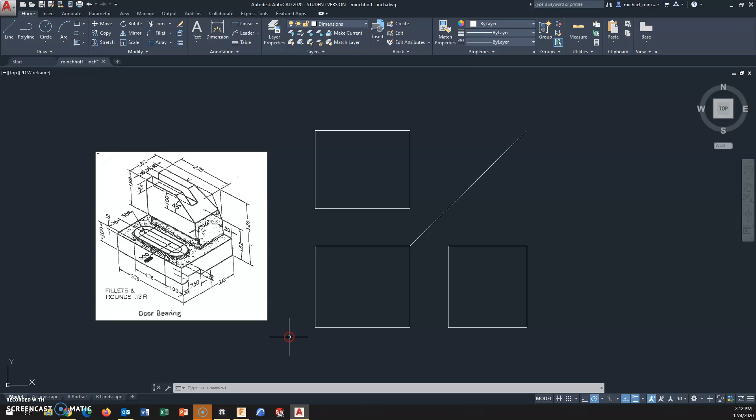Okay, the last drawing for this semester is the door bearing. We are back in our inch template, first of all.

Keep that in mind, the fact that we are in inches. We were using a 1.5 inch space in between the views, and we're going to stick with that. We're not going to change it now.

Typically the mistake is the height of this slot. The distance from the bottom to the top of the slot is 1 inch, which means this base material will be 1 minus 0.12. So this base material is only going to be 0.88 inches thick, because the 1 inch is to the top of this raised slot.

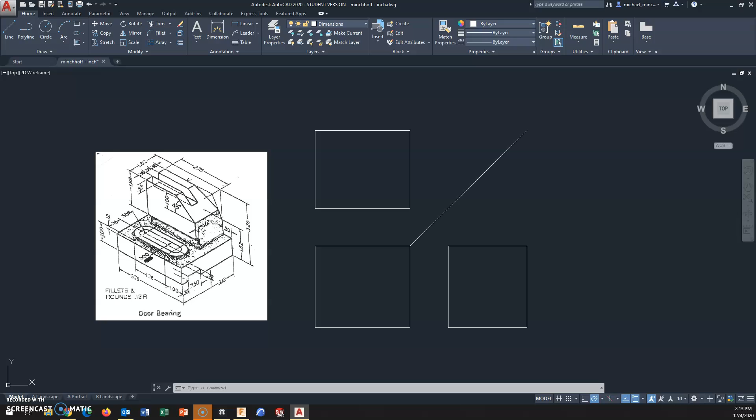I don't have that much else to say. We're just going to get right into it.

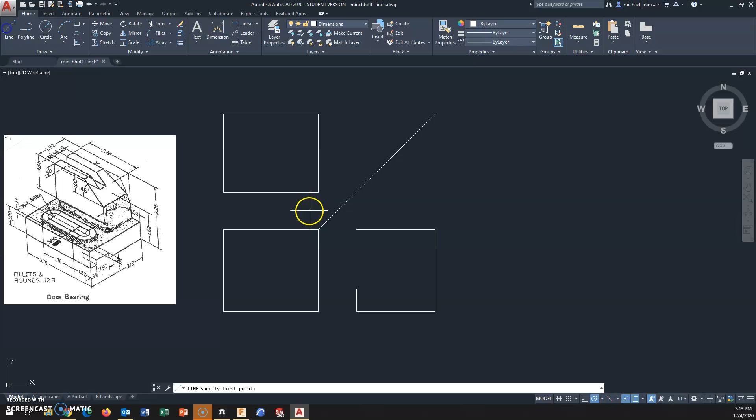And work right here off the right side for a good portion of this. 162 across the top.

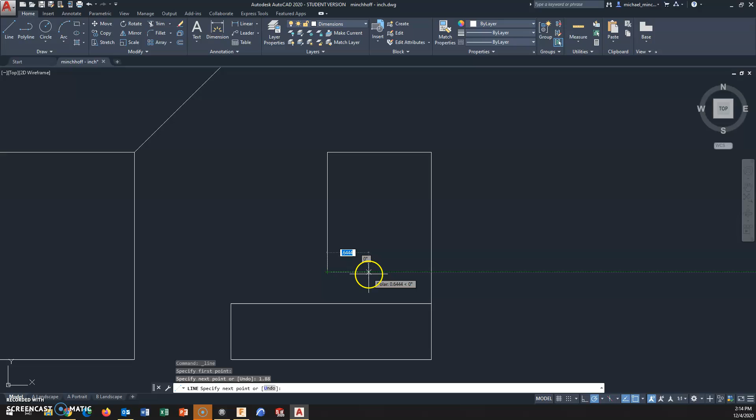And we'll start making some other features here. This drops straight down for a little bit. 188 comes in 0.12, makes this little undercut right here.

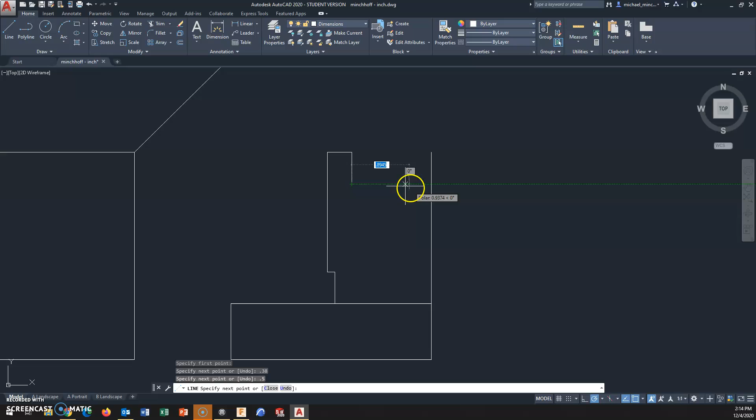From here, we're going to measure over, down, and back up to make that groove cut here in the top. So 0.38, 0.5 down, 0.38, 0.5 back up, and 0.38.

This comes down at an angle. We don't really know exactly where it meets at this point. We do know that this backside is 1.62 up from the bottom.

This will now allow us to create that angle on the backside. It's not an angle measurement, it is from point to point.

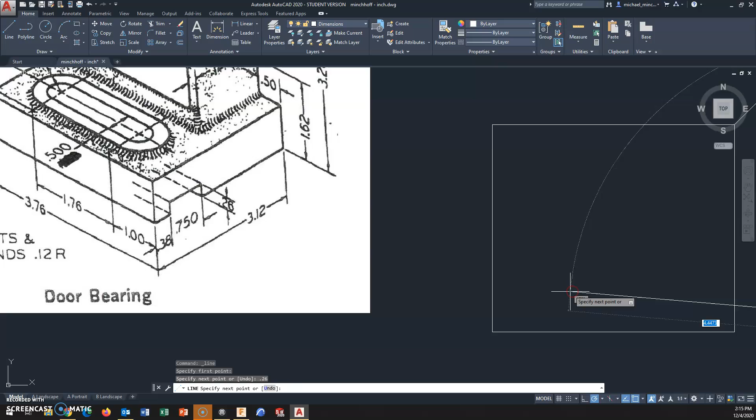We have a groove that goes through the bottom, and as we measure across, it is 0.38 over, 0.26 up, 0.75 or 0.76, 0.75, and back down and over.

We could come and construct a raised slot, but I wouldn't say we'd be guessing, but it necessarily doesn't line up with the center here. I would create that slot in another view prior to creating it.

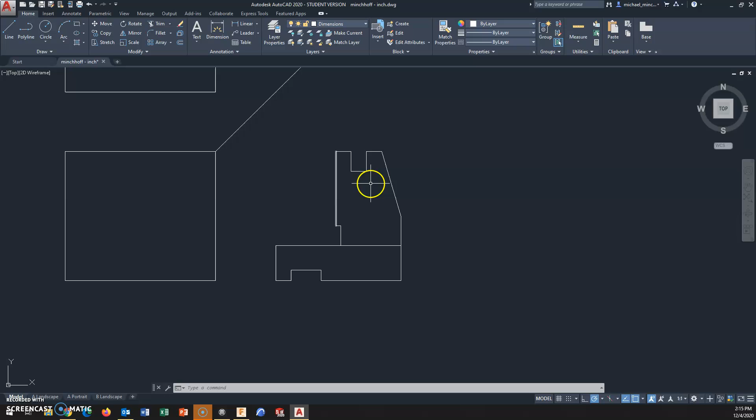There's also an edge that goes across here. The fact that it's a 45-degree angle, we could measure 1 inch down and do that, but I'd wait till you have something to project off of.

All right, object line, hidden line. Might as well change that now. Okay.

We measure in 1/2 inch on both sides. And these will drop straight down to the base.

This is due to the fact you can easily see this 1/2 inch on this side, but this overall length of this vertical section is 2.76. So 3.76 minus 2.76 minus 0.5 gives you a 1/2 inch left over on this side.

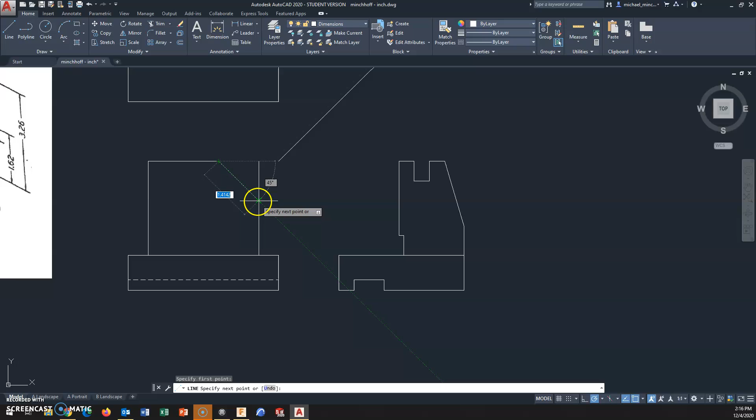We have a 45-degree angle at 1 inch. I have my 45-degree angle snap turned on. Project straight down.

The edge of that machined face comes right across. I have this back edge that will be a hidden line, and I have the groove that goes through that will be a hidden line. I'll run that all the way across.

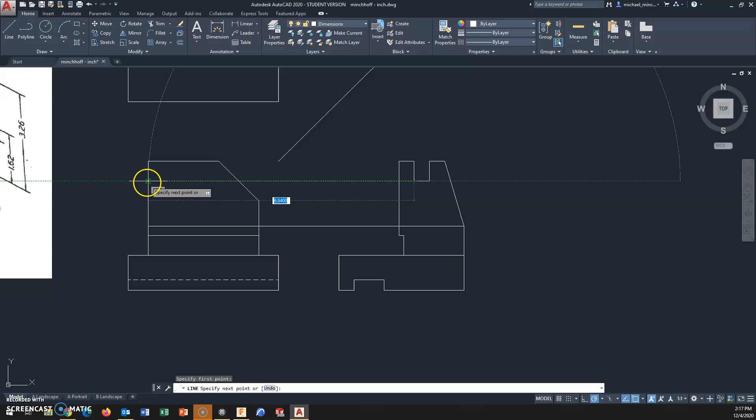It's close to the midpoint. Actually, it should be on the midpoint, but these two are going to be hidden.

Okay, so we've taken care of everything really but the slot in the front and the right side view. Projection to the top.

This is that groove, or sorry, this is the width here at the top. This is the 45-degree angle cut.

And now we're going to project from the right side. So as this comes up, over and across, take these off as we go.

This groove is going to continue across.

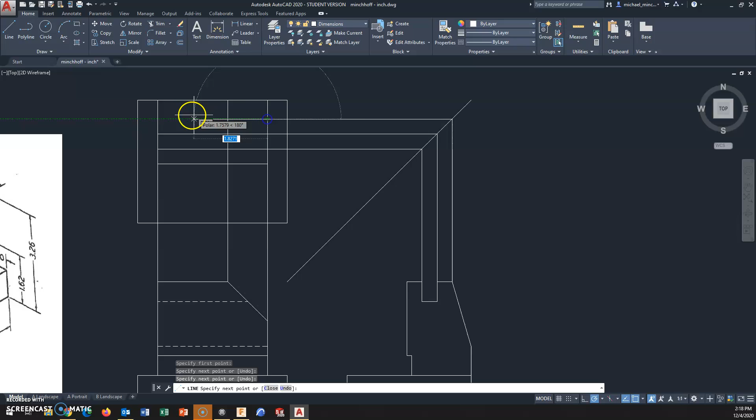Mirroring doesn't help here. It's not a symmetrical object, so there's no mirroring involved. And this is that back side, so this will come into play as we go to project this.

All right, so this groove that goes through the top, this edge is actually going to stop right here, so I'm going to trim that one off. This line won't exist because that's on that machined angled face in the back. So let's take some of these off. Oops, not the whole thing.

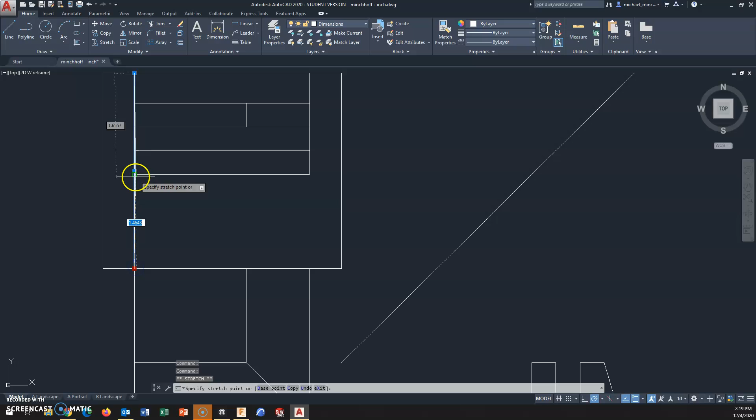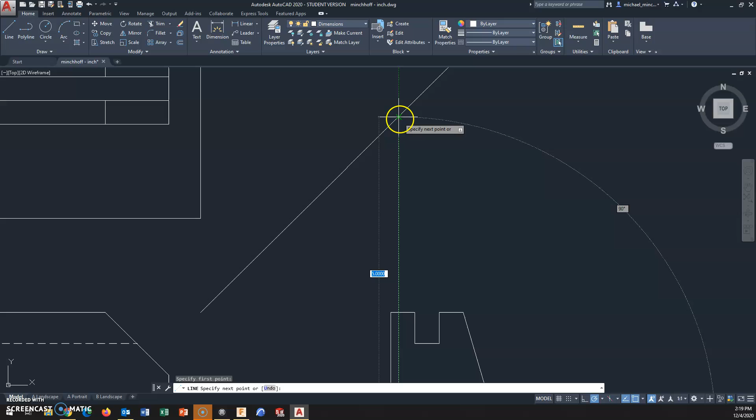Okay, there'll be a hidden... darn it, I just trimmed that off and then I deleted it. There will be a hidden line for that little undercut, and this is the hidden line.

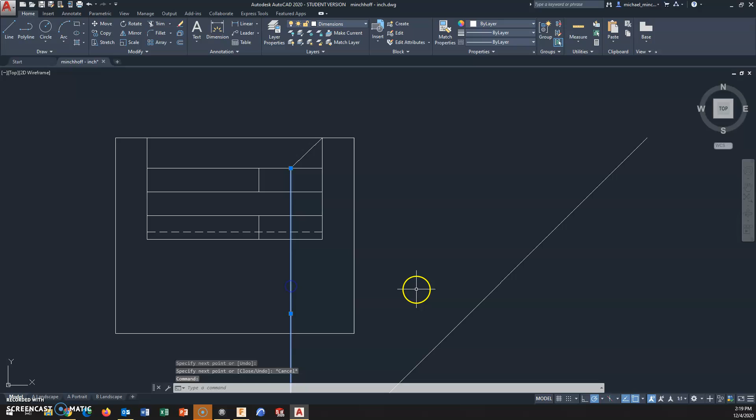Okay, this back machine face will fade at an angle, and that is directly from here where that takes place. So this surface actually flares out.

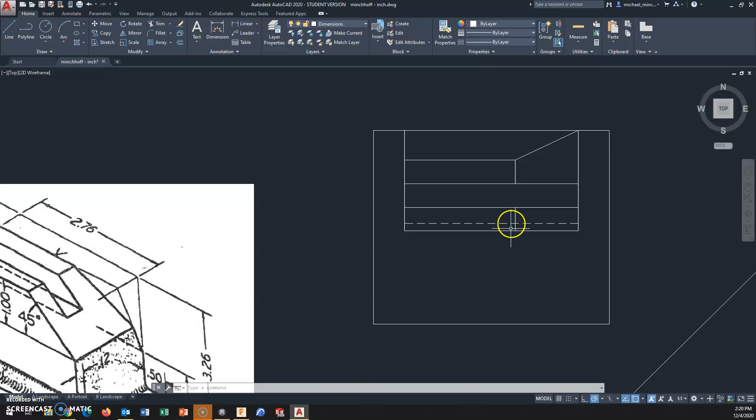That is, oops, sorry, wrong point. Forget that projection. This surface here, that flared out, that trapezoid, is actually this being cut at the angle. Okay, 45-degree angle projection here, said earlier.

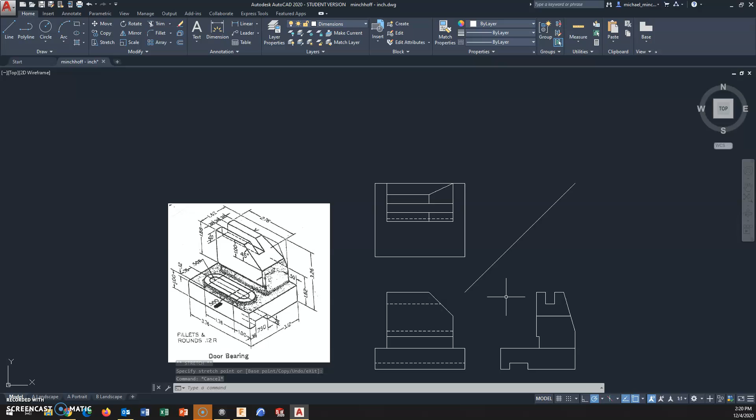And all I should have to do now is create the slot. No, this is the projection. I think I do these ahead of time, then forget stuff. These lines do not extend out past. This is where that groove starts and stops. So this surface in here is this surface right here.

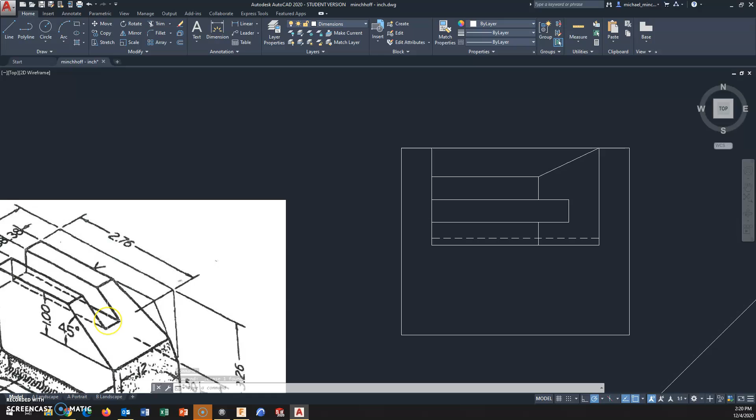Okay, to the slot. We know that this slot takes place 0.75 inches in, 1 inch over, and then the distance from center to center is 1.78. So I'm going to delete this now because I have marks for my slot that I need to create.

So this slot width is 0.5 for the inner slot. Then the outer slot is a radius of 0.5. I guess I should draw this in radius. Is a radius of 0.5, and a radius of 0.5. Tangent lines at the quadrant points, and we'll trim this out.

Quite a bit of trimming involved here. There's the outer. Here's the inner.

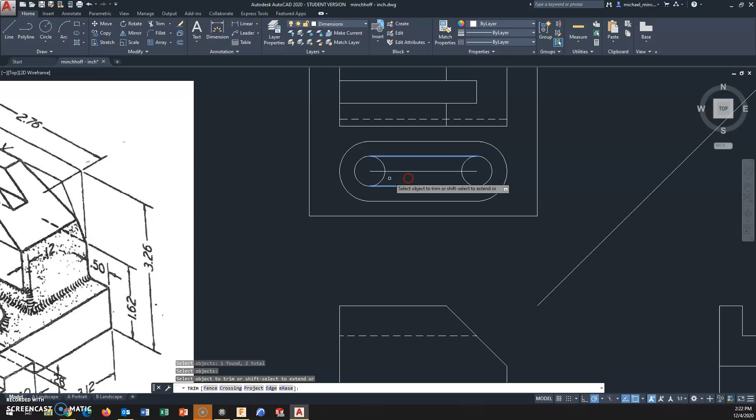Okay, so we need to project this all the way through as well. So it does line up here. So you only have to worry about taking a measurement vertically. This one's going to go all the way through.

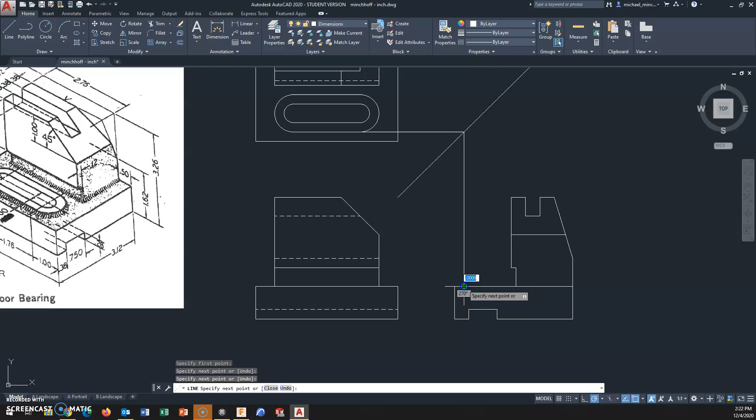I think I would create the raised slot, the fact that it's raised, in this view first. So this is 0.12.

All right, so 0.12, I'll have a line that goes across here. Actually, I know it's 1, and drop it straight down. Now this line can project here. All right, so this and this line up.

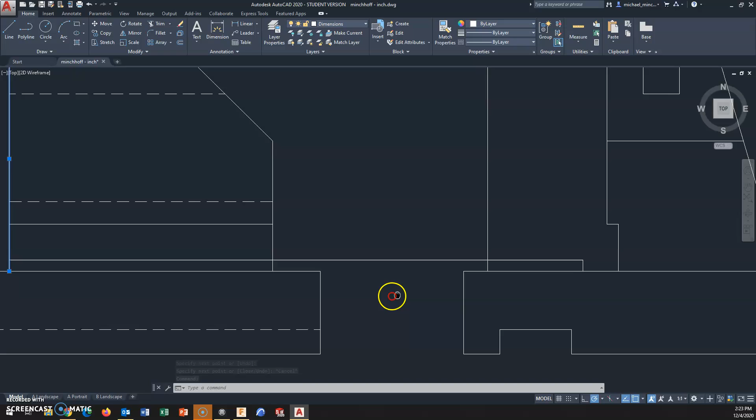Well, we'll put some fillets in here, but that's the starting point for that raised slot.

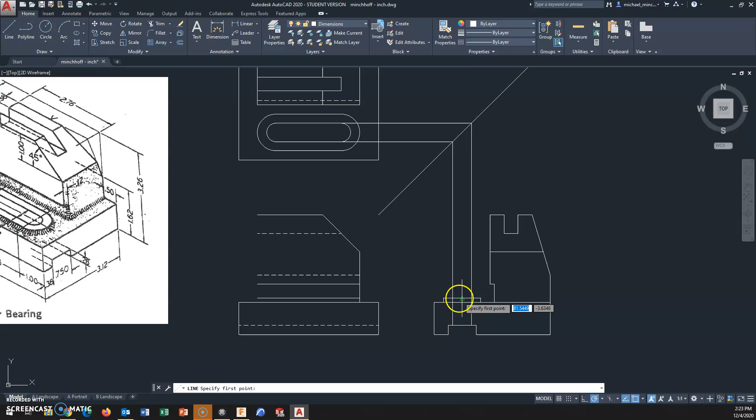So we do need to project the inner slot information, and this will go all the way through. These will become hidden lines, and I might as well project my center line. There we go. Okay.

That line's not straight. It is not straight, or it does not line up on the bottom. It is awful close. Oh, 0.125 extends up past the edge of the object, and that is a center line.

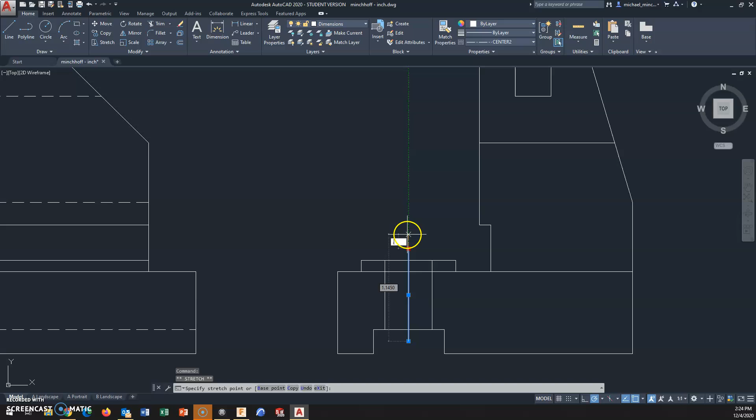A little more. Line type appears. These are hidden. Okay. Ooh. Lost it somehow.

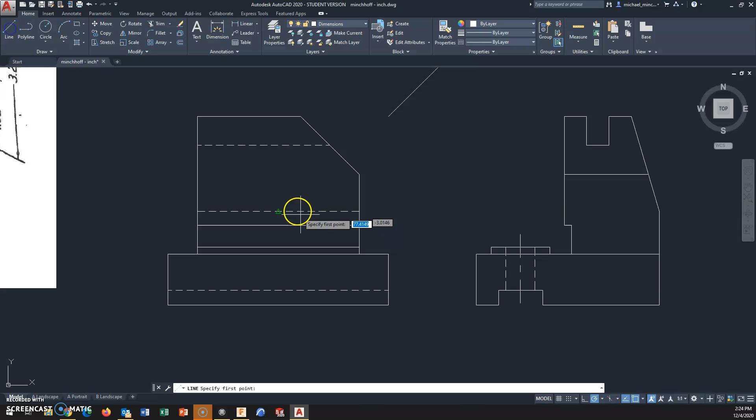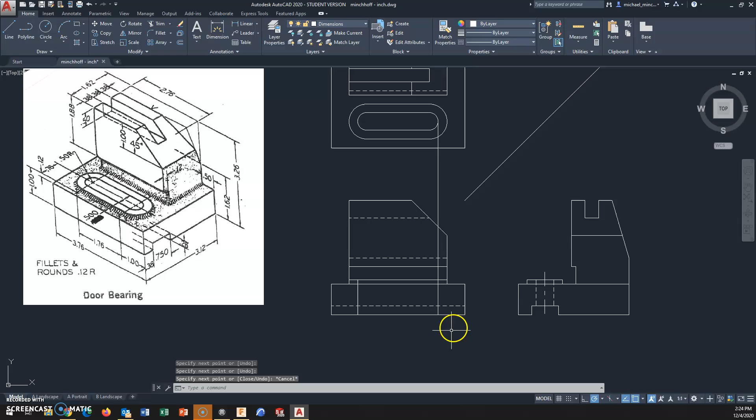So all I really need to do is bring this inner line down. It does go through that raised slot, and same with this one. These will be hidden lines, and gotta stop here at this hidden line.

And then I have some center lines. I should have 2 center lines for both centers of the slot: the raised slot to the groove, raised slot to the bottom of the groove. All right, so these will be centerlines.

Change that dimension up.

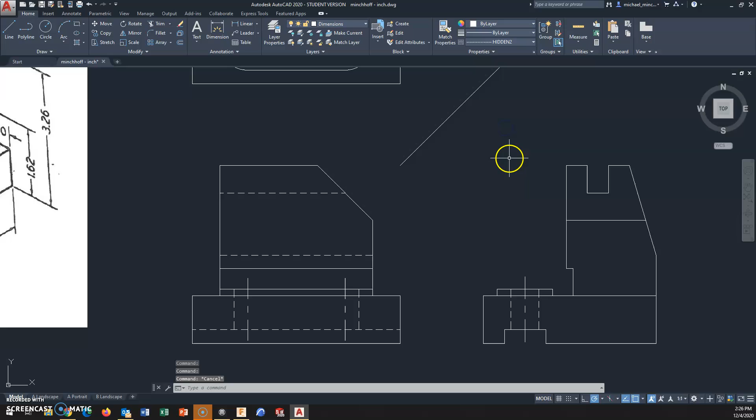So these are centers. These are hidden. Put some fillets on, and we'll dimension this here in the next video before I run out of time.